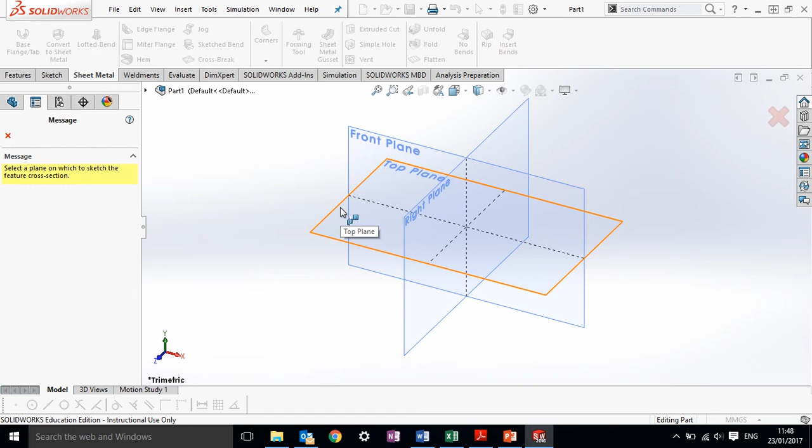Okay, so we're going to start with a metal box which is going to be used for the base of, or going to be used as the main shelving component. So we're going to start with a base flange or tab, and we can draw this on the top plane. You could use other planes, but we're going to work with the top plane here. Okay, so I'm going to draw a

center rectangle, and I'm going to draw out. Note how I have the center of my shape on the red origin arrows. Okay, so that means that it's easier to fully define my shape.

So I can click OK on that, and I want to smart dimension this, so I'm going to give it the dimensions of 200 by 60. It doesn't matter too much what dimensions you use for yourself as long as they make sense to you. So 200 by 60. Okay, and I can click this little blue arrow here.

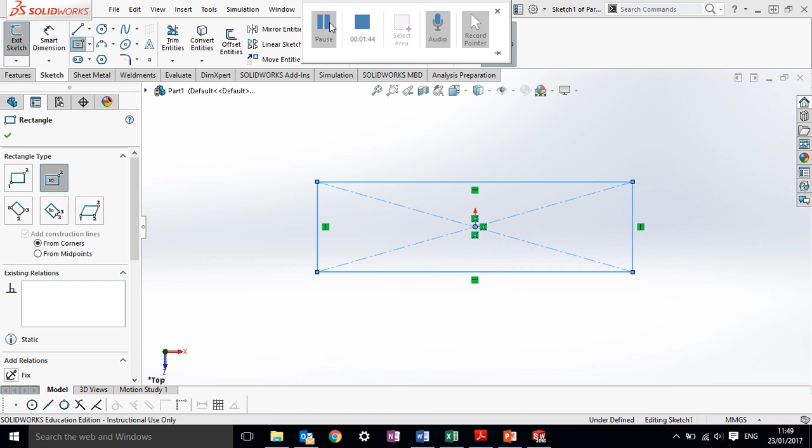I will then get an option to add a thickness to this material. So I can use a gauge table, which will give me materials that are normally used in different engineering materials. So if we go for a sample table in aluminium metric, doesn't matter too much, that'll take a couple of seconds to load, and then we can browse.

Okay, so you can use that if you like. Basically that just has certain parameters and tells the materials to work in a certain manner. We're going to set a thickness as well, so the material thickness is going to be 3 millimeters, and everything else can be the same. That's fine.

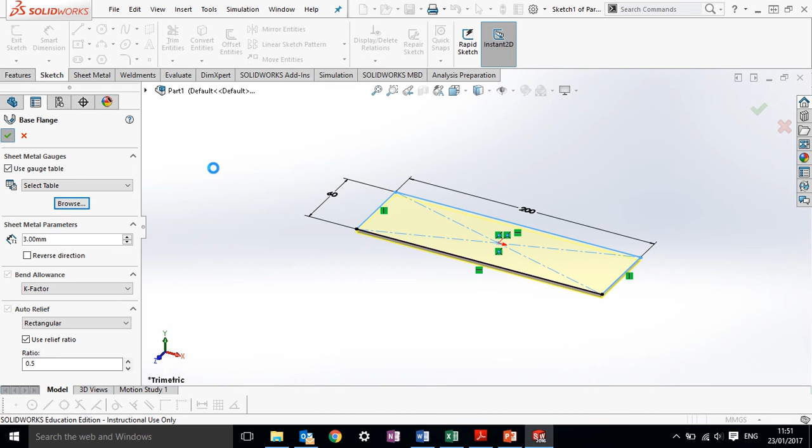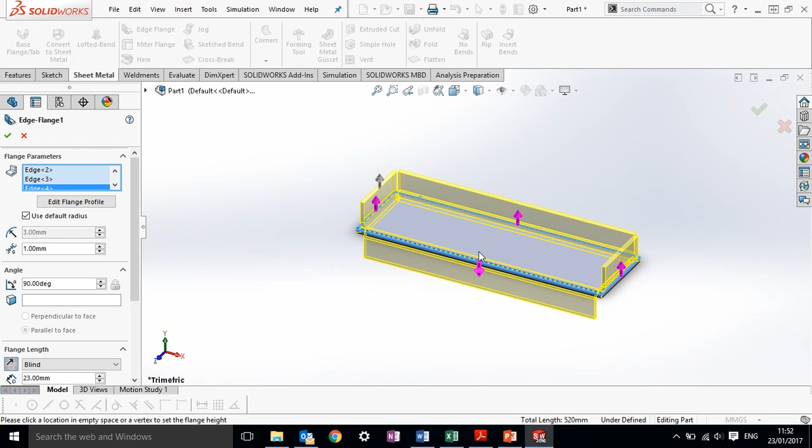So that's our sheet metal base. So now we want to put on an edge flange here. Edge flange. So it's important to do all of these at the same time, and basically you're going to select your 4 corners. Okay, sometimes you might accidentally press the bottom and get something a bit like that.

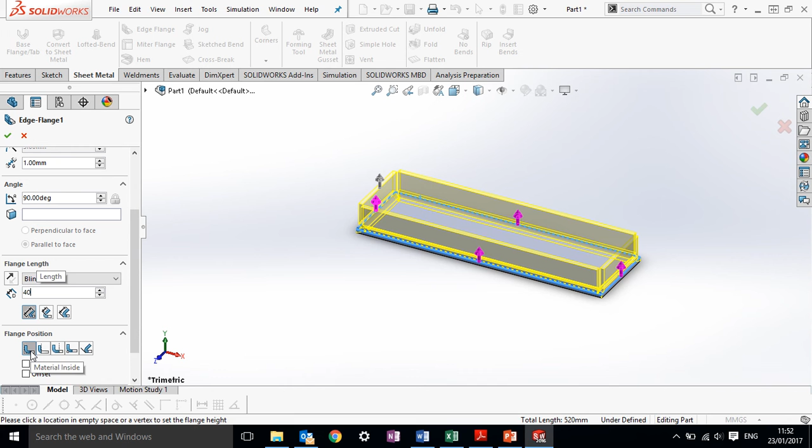If that happens, just press the arrow and it'll change direction back again. It's important to do all of these at the same time, so if you don't do them all at the same time, then you get funny corners and they don't work out the way that they would actually work out in real life. The flange length we're going to set to 40 millimeters. Okay, and the flange position is the material inside, so the overall shape of the material or the overall dimensions of the base is not going to change. If it was important to keep the 200 by 60 on the inside, then we would have material outside, or even the bend outside. So there's a few different ones that you can have a look at there. Okay, but for this we're going to use material inside.

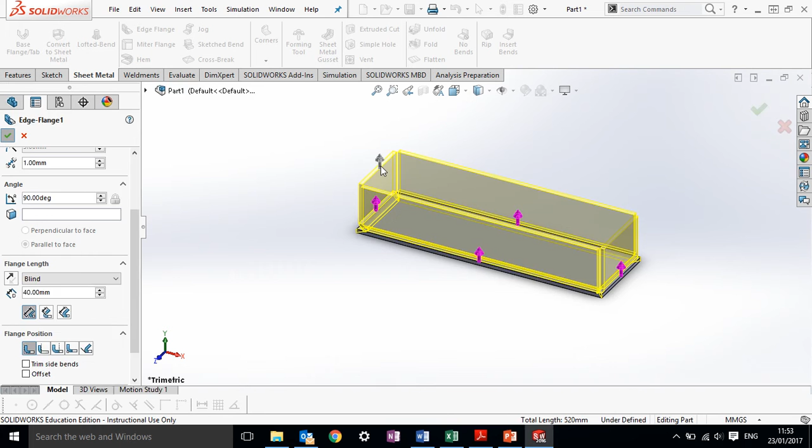I'm also going to put a hem, which is basically a rounded edge on the top of 3 of these shapes or 3 of these sides to nicely, just make it nice to touch, and it's not going to cause any cuts or any scrapes or anything like that. So we're going to use a hem, and again this is taking a few moments to load.

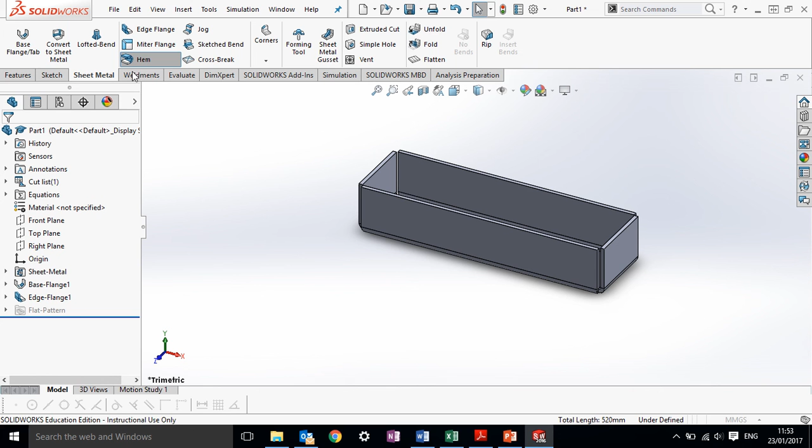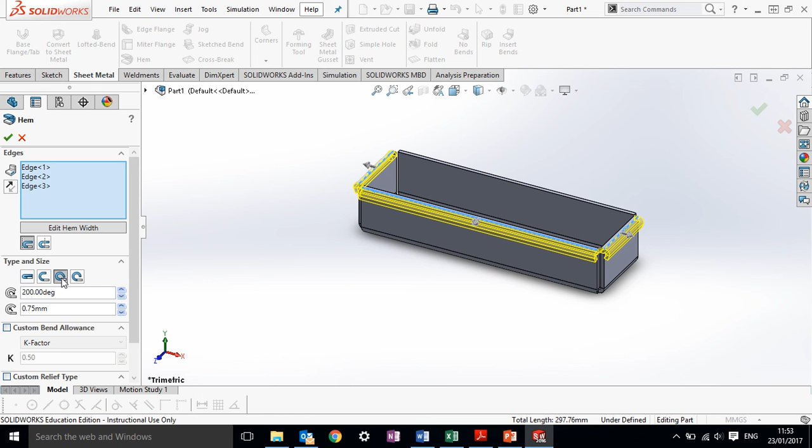So again, select the outside edges, and I'm just picking 3 there. Okay, I can edit the details here if I want, so I'm going to go with a rolled hem. Okay, and actually no, I'm going to go with the teardrop. Teardrop is a bit nicer looking. Basically it will fold in over the edge of your workpiece. Okay, something similar to that. Click OK.

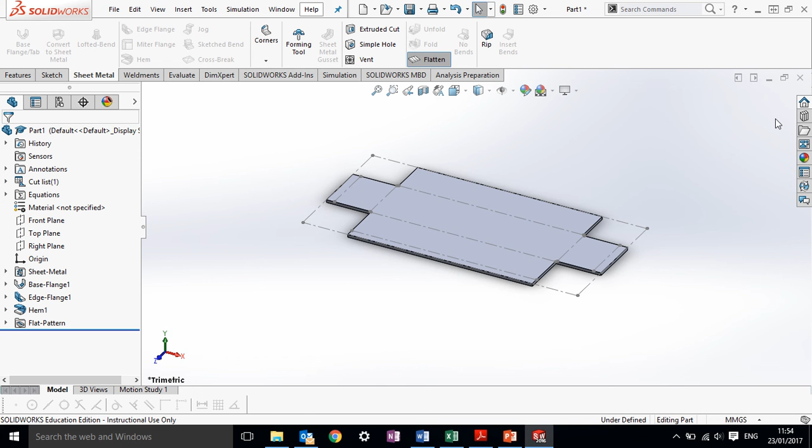Okay, and at that point then we can flatten out the material if we like, and it shows us how big the material is and where the bends are. Okay, so that's something that we can do if we like. Okay, so we can save that. File, save as. Okay, so this is going to be the box shelf. Okay, so that's what I'm going to call that. Okay, and that's component 1 done.